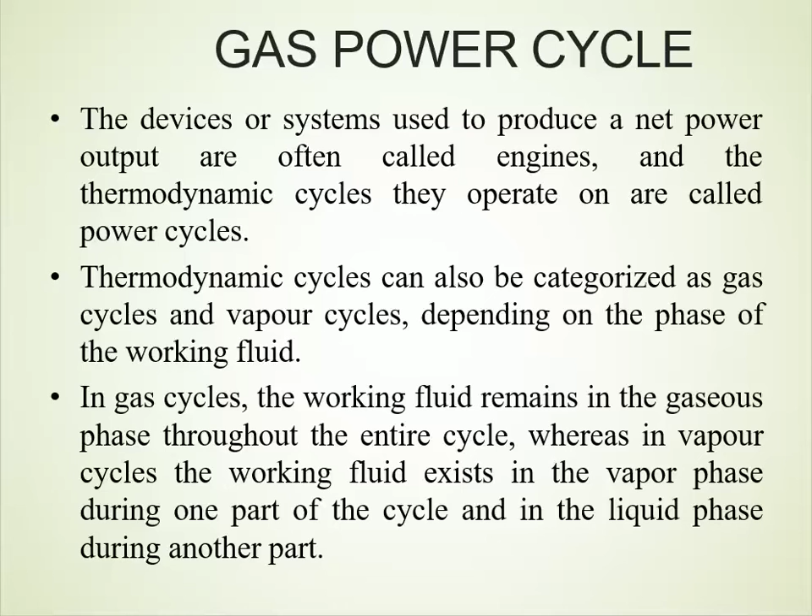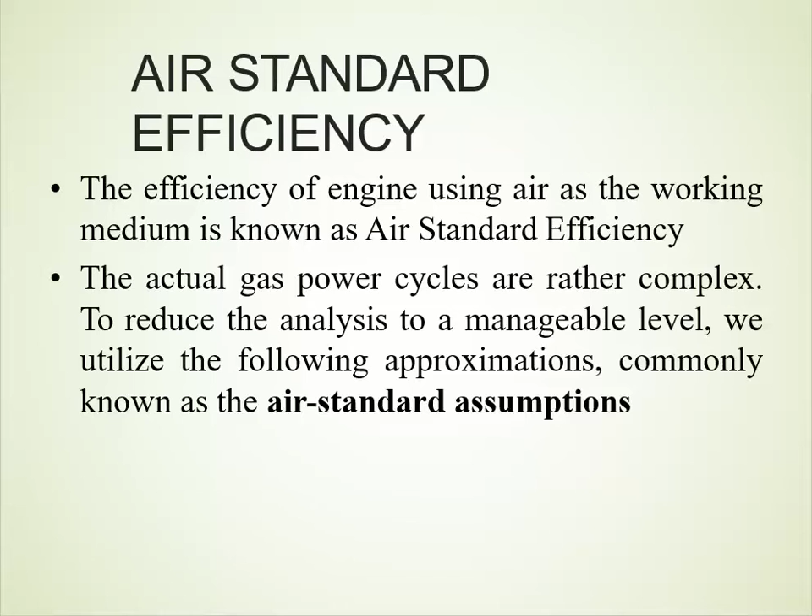What is air standard efficiency? The efficiency of an engine using air as the working medium is known as air standard efficiency. The actual gas power cycles are rather complex. To reduce the analysis to a manageable level, we utilize the following approximations, commonly known as the air standard assumptions. For the air standard cycles, we have to take several assumptions.

The first assumption is that the working fluid is air. As you know, air itself is not a power source. Still, we assume the working fluid is air. In the cycle, all processes are reversible. We consider all the processes reversible, although such processes could be irreversible. But initially, we will assume that all the processes are reversible.

Then, the mass of working fluid remains constant through the entire cycle. Here we apply the law of conservation of mass, which implies that there is no mass loss during the process. We will also apply the law of thermodynamics, that is, energy can neither be created nor destroyed, only transformed from one body to another or from one form of energy to another.

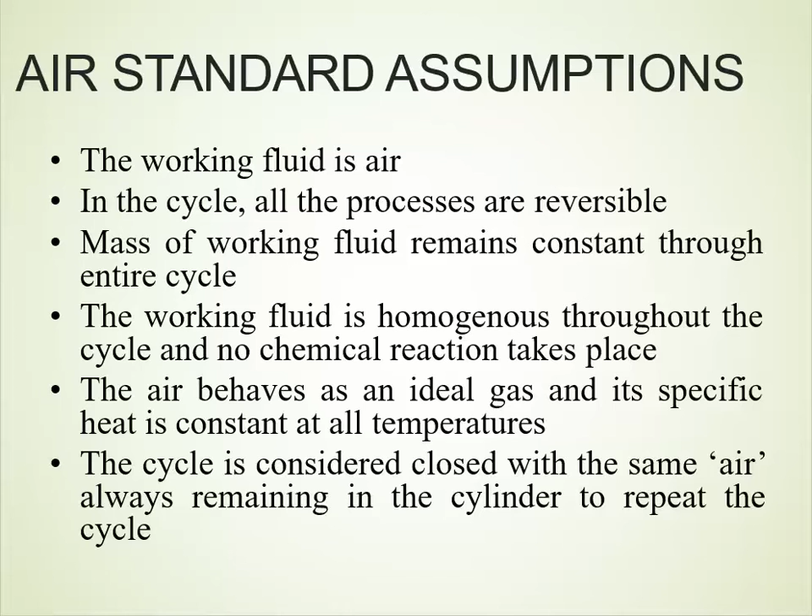The cycle is considered closed, with the same air always remaining in the cylinder to repeat the cycle. We are saying that the air in the cylinder will be the same and will not change during the process. On the basis of these assumptions, we introduce a cycle, the Carnot cycle. The scientist Carnot introduced this cycle and made some practical applications of it.

First, we will discuss what the Carnot cycle is. The Carnot cycle is a theoretical ideal thermodynamic cycle proposed by the French scientist Carnot in 1824 and expanded upon by others in the 1830s to 40s. It provides an upper limit on the efficiency that any classical thermodynamic engine can achieve during the conversion of heat into work, or conversely, the efficiency of a refrigeration system in creating a temperature difference by the application of work to the system. It is not an actual thermodynamic cycle, but a theoretical construct.

Every thermodynamic system exists in a particular state. When a system is taken through a series of different states and finally returns to its initial state, a thermodynamic cycle is said to have occurred. In going through this cycle, the system may perform work on its surroundings, for example by a moving piston, thereby acting as a heat engine. A system undergoing a Carnot cycle is known as a Carnot heat engine, although such a perfect engine is only a theoretical construct and cannot be built in practice.

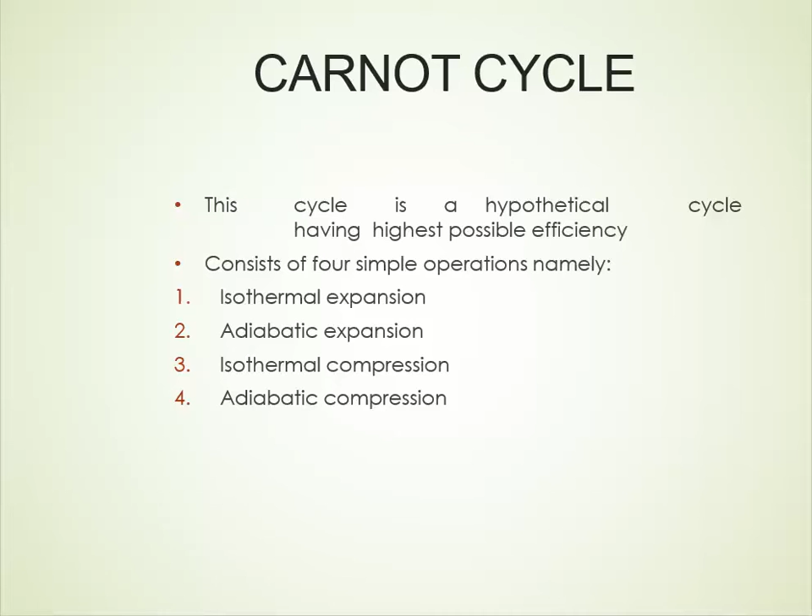Second, we have isentropic. The isentropic is a reversible adiabatic process. In this, the gas in the engine is thermally isolated from both the hot and the cold reservoir. Thus, there is neither gain nor loss of heat in an adiabatic process. The gas continues to expand by reduction of pressure, doing work on the surroundings and losing an amount of internal energy equal to the work done. The gas expansion without heat input causes it to cool to the cold temperature.

The entropy remains unchanged. In the third process, that is isothermal compression, heat is transferred reversibly to the low temperature reservoir at constant temperature. The gas in the engine is in thermal contact with the cold reservoir at temperature Tc. The surroundings do work on the gas, pushing an amount of heat energy Q2 to leave the system to the low temperature reservoir and the entropy of the system to decrease by that amount.

Fourth process is adiabatic compression. In this process, once again the gas engine is thermally isolated from the hot and the cold reservoir. The engine is assumed to be frictionless, hence reversible. During this step, the surroundings do work on the gas, pushing the piston down further, increasing its internal energy, compressing it and causing its temperature to rise up to TH due solely to the work added to the system, but entropy remains unchanged. At this point, the gas is in the same state as at the start of step 1.

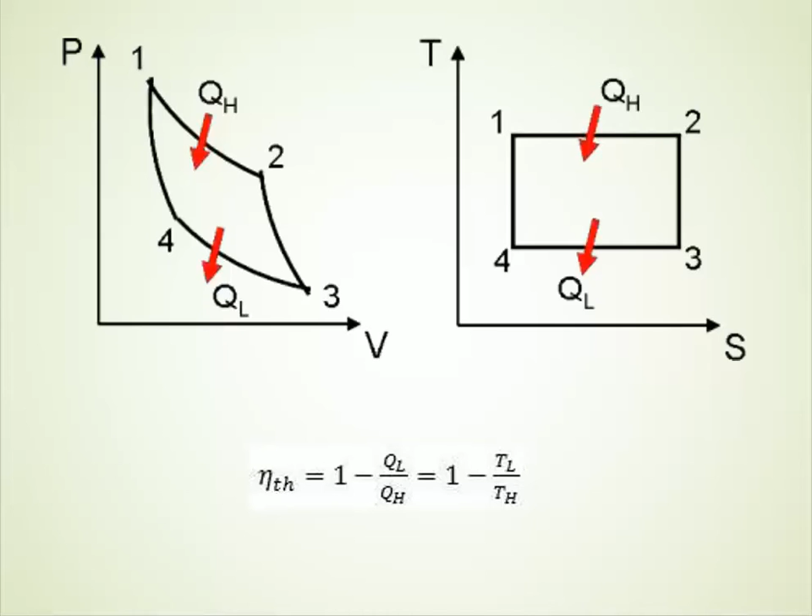For this cycle, several assumptions have been made: the piston moving in the cylinder does not produce any friction during the motion. The cylinder head is arranged in such a way that it can be a perfect heat conductor or insulator. The walls of the cylinder and piston are considered perfect insulators of heat. The heat transfer does not affect the temperature of sinks and source. Compression and expansion processes are reversible. Working medium is a perfect gas and has constant specific heat. These are the assumptions made during the Carnot cycle.

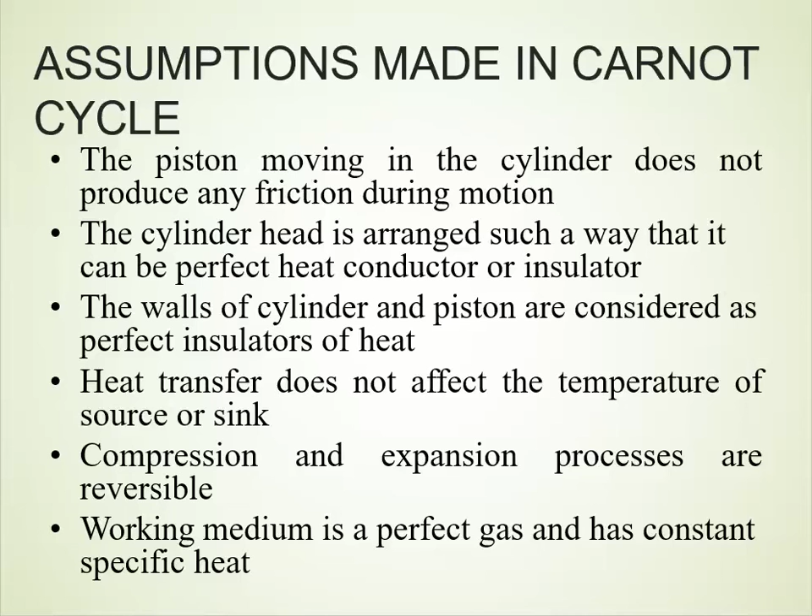On the basis of the Carnot cycle, several cycles have been made by which we are able to produce engines that work on different fuels, where the working fluid is not air, by which we are able to use different media and work on it. On that basis, we have one cycle, that is the Otto cycle. The Otto cycle is also known as the petrol engine cycle, as the petrol engine works on this Otto cycle.

We have 4 processes overall. In the 1 to 2 process we have reversible adiabatic compression. Second, we have process 2 to 3, in which heat is added at constant volume, that is an isochoric process. Then in 3 to 4 we have reversible adiabatic expansion, and process 4 to 1, that is rejection of heat at constant volume.

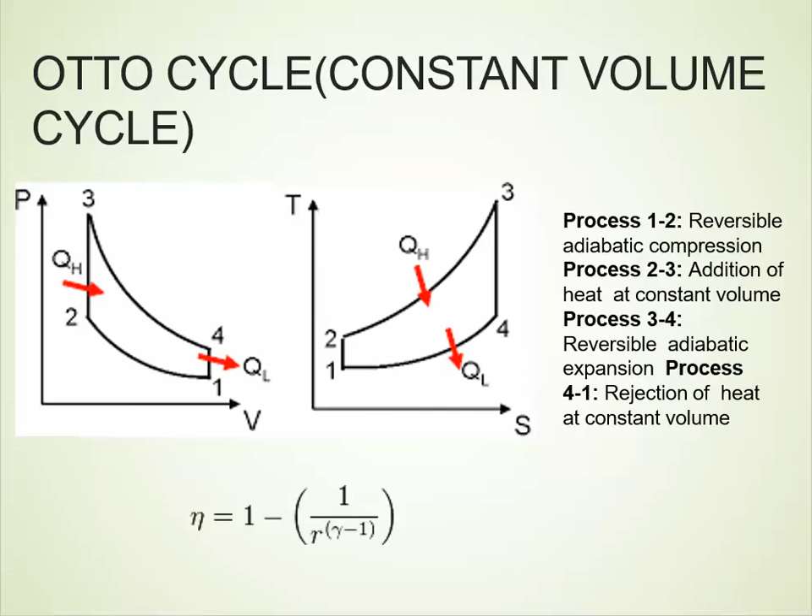Today we are ending this lecture on the Otto cycle, and stay tuned for the next video in which we will discuss more cycles.